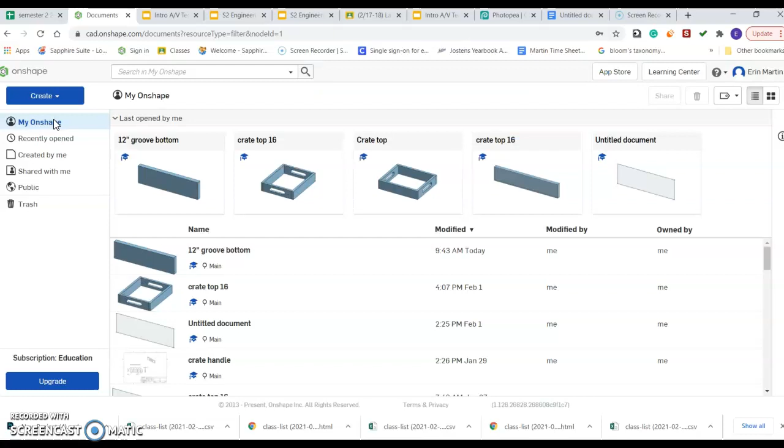New document. Whoops, why did I put an E on the word bottom? I don't know if I can change that name or not. Thankfully I can.

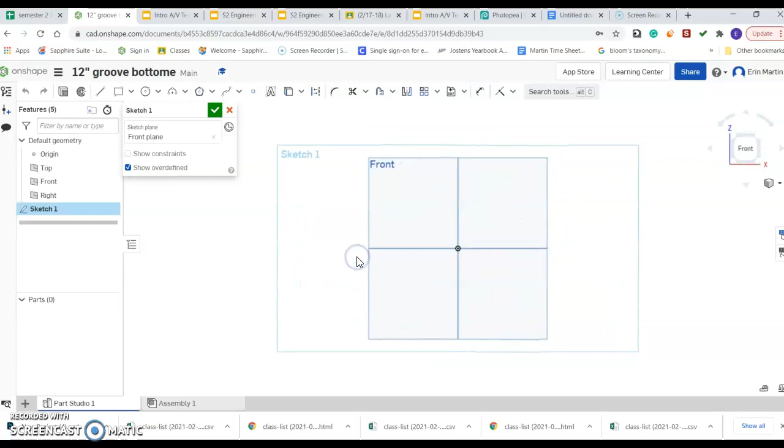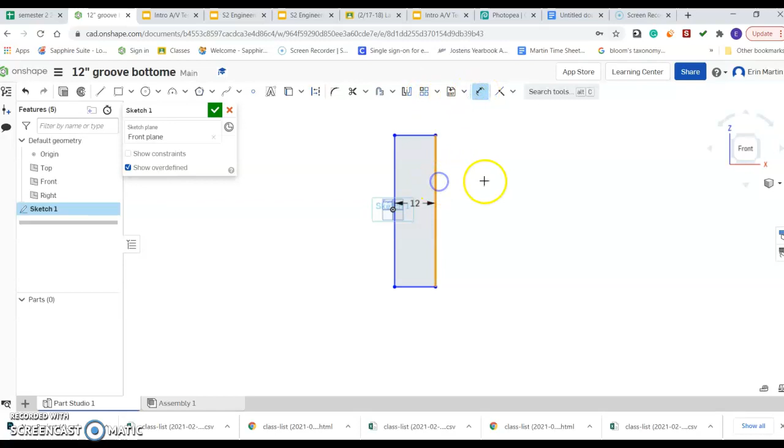All right, so I'm going to start by right-clicking, new sketch, right-click, view normal to sketch plane, create my rectangle. It is going to be 12 inches. I just made it 1. Let's amend that. So I double-clicked. Now it is 12 inches wide. I only want it 3.5 inches in height. Yes, that is looking much better now.

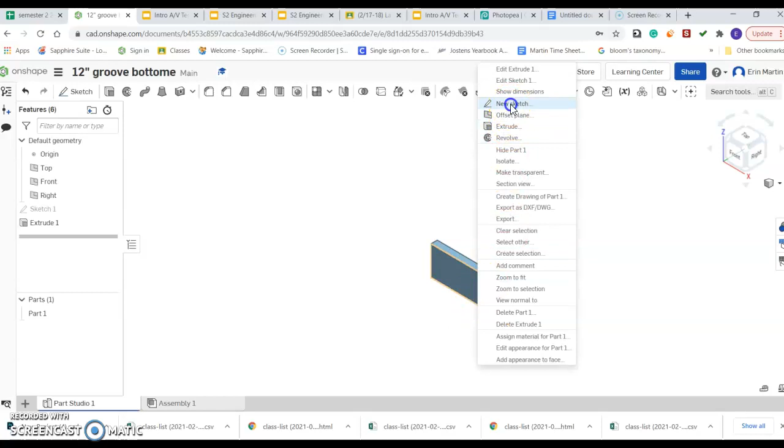And I believe we are ready to extrude it. It will be extruded to 3/4 of an inch. I always like to go to isometric to make sure it is extruded correctly. I'm then going to right-click for a new sketch, right-click, view normal to sketch plane. I'm now going to be putting a rectangle in, and this rectangle is going to be my groove. Whoops, I don't have my rectangle tool.

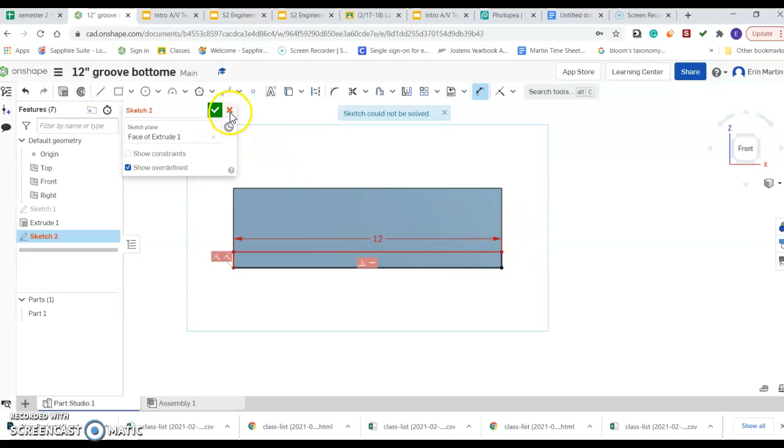So here's my rectangle. I am going to specify that I want this rectangle to be 12 inches. I guess it doesn't like me doing that. Okay, actually, let me show you this in a different way. Let's just delete that. All right, we got rid of sketch 2. Now I'm going to right click. No, that's not what I wanted.

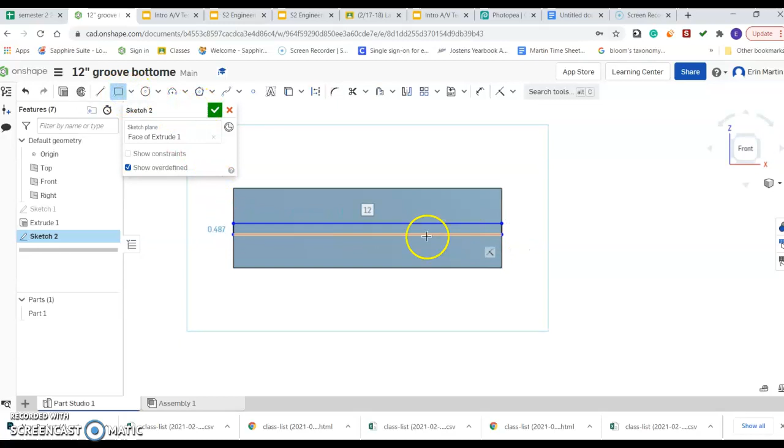Right click, new sketch. Now, in case you didn't catch how I got rid of that sketch, you can do a right click and simply hit delete. So I'm going to put my new sketch in here again. And I'm going to put my rectangle in. I think I don't want to click this bottom corner. I think that's what caused me some problems.

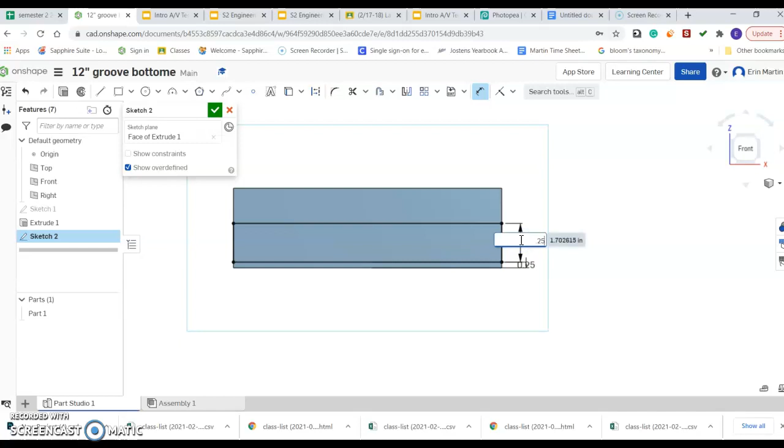So now I want to say the groove is going to support our floor, and it is going to be a 1/4 inch off the bottom of our board. This is going to be a 1/4 inch. And that groove is only going to be a 1/4 inch. So the groove is a 1/4 inch off the bottom, and the groove is a 1/4 inch deep, or a 1/4 inch in height. So that's our second sketch, just this rectangle that is a 1/4 inch up and a 1/4 inch tall.

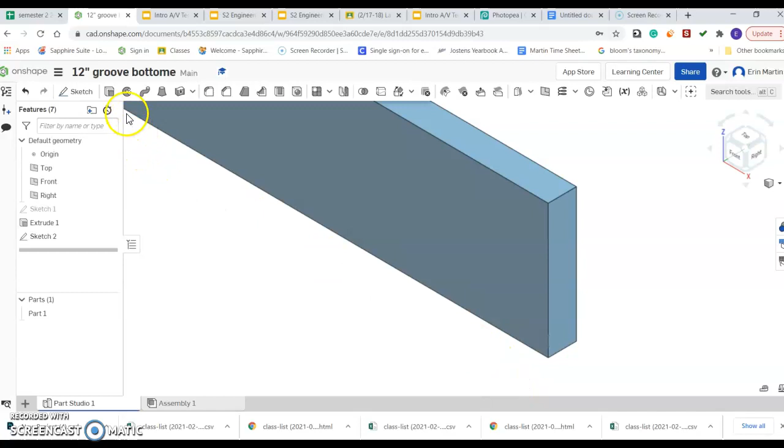And then we are going to extrude that rectangle, but we are going to remove, so we're going backwards, but we're only removing a 1/4 inch. And that is our final outcome for our part.

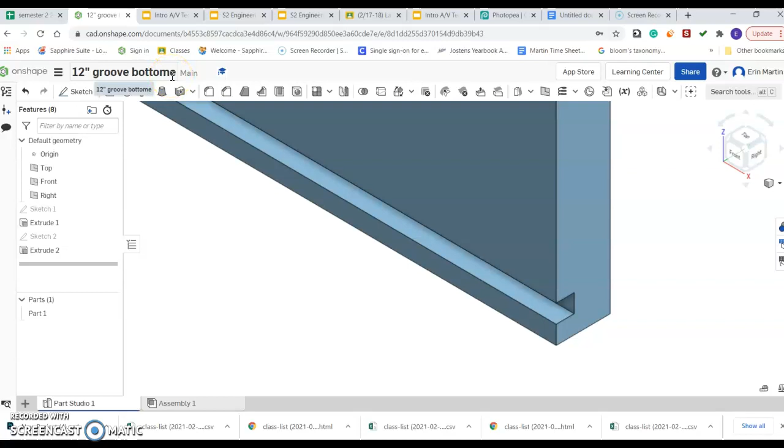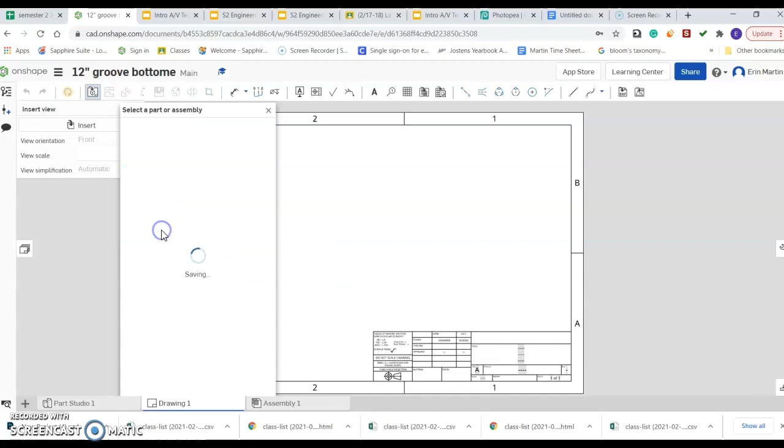I thought I updated this name. Oh goodness. We do want to now put this into a drawing. So we'll do our plus sign, create drawing. We do want it in ANSI A inch. Okay, so here's my part. Double click. And let's change our scale to 1/4 inch.

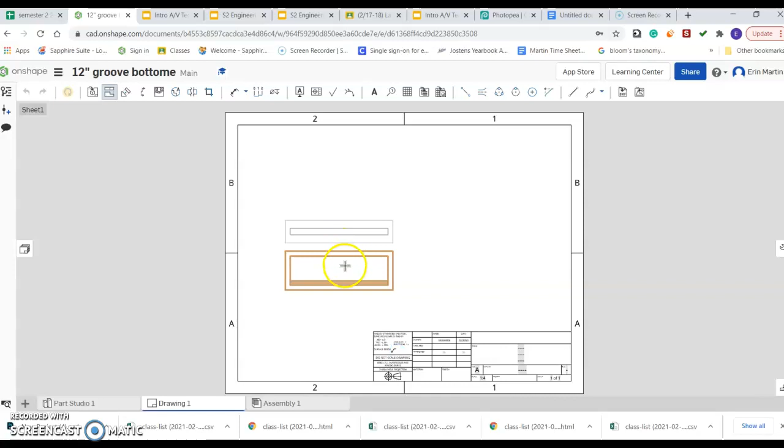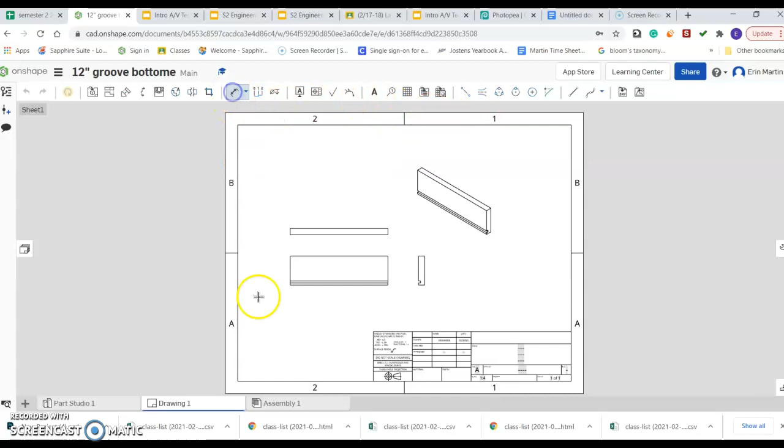So we're here. Go to here. Here. Here. And I then like to hit escape on my keyboard. We now are going to dimension. Oh, so if we remember, we can go over here and hit the wrench so we can make our units in inches fraction.

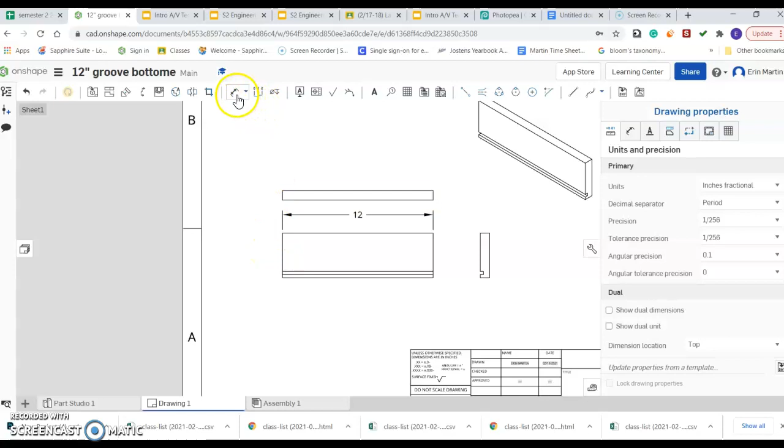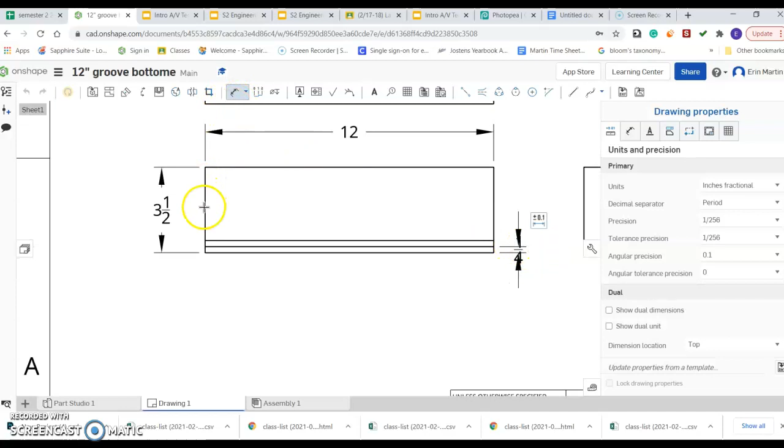Now we don't want to just dimension that as 3. We want to dimension from here to here to be 3.5. We then are going to specify that the groove is 1/4 inch up. And we're going to specify that the groove itself is 1/4 inch in height. Now we don't want to leave that number in there. We want to bring him out.

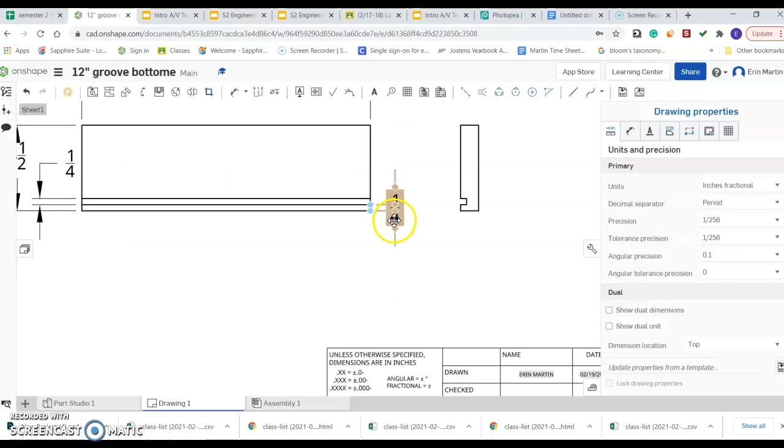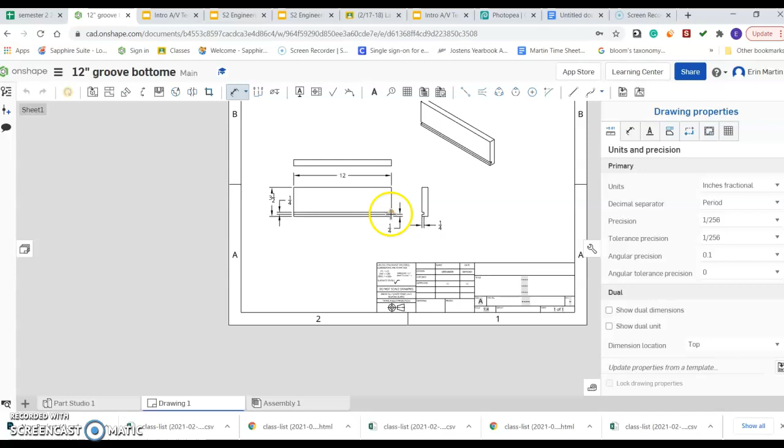And then the other dimension that's really important for us to put on here is on our side view. We need to specify that this is 1/4 inch deep. And that is our drawing. So this drawing is what you do need to screenshot today to put in your assignment. Please include, either have this name visible or this name. This one's actually easier for me to read. Do not put any dimensions on the isometric view. So we're going to do our screenshot.

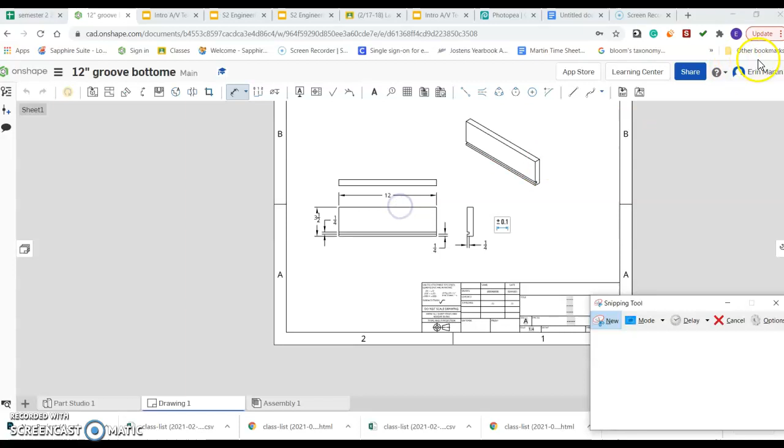And I don't have the slideshow there yet, but there is going to be a placeholder. Let me show you where this will be. Under week 5, it'll say 219 in class, or maybe I'll put FID day so we know in class FID day assignment, and it'll say 12-inch groove bottom, and there will be a slideshow in there as well as this video for you to put your work in.